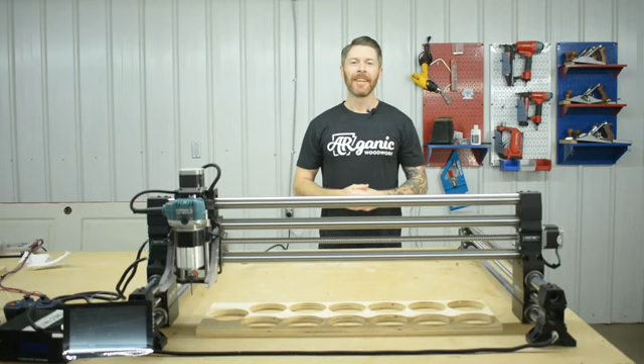Hey guys, Cody with Organic Woodwork, and I'm here with the Onefinity CNC machine again.

When we first introduced this into the shop, we had a lot going on as far as production and didn't have a lot of time to invest in putting together a mounting stand for this. After using the machine and seeing the durability and stability of it, I've decided that I want it to be a vertical mounting CNC, and today we're going to walk you through how we create our base for the Onefinity CNC machine.

Okay, so before we start building our frame and moving the CNC, we already have it temporarily secured to this workstation. When we did that, we made sure that it was completely square. So now, before we move it, we're going to measure our outside perimeters of the CNC. That way we know we get the exact measurement that we need for our frame for when we vertically mount this thing.

Alright, so here's my thinking behind the frame. This is the Onefinity that we have drawn up. As you can see, our y-axis are the points in which we screw down. Our y-axis points here and here are connected by two hollowed out steel beams that have wires to connect to the stepper motors, which are not drawn. Those two steel tubes plus the screwdrive mechanism in the middle make it very stable and extremely sturdy. So when mounting to the frame, our objective is to really control from our left and right y-axis points.

So we will take 8/4 pine, we'll rip it to 41 inches, seen here, and we will go from our left and right in both the bottom and the top, or the front and the back, however you want to view that. Remember, we're actually going to mount it this way. The x-axis also has two steel tubes plus the screwdrive mechanism, plus our x-axis has the stiffy attachment, so that gives it 3 steel tube attachments that connect our y-axis here and here.

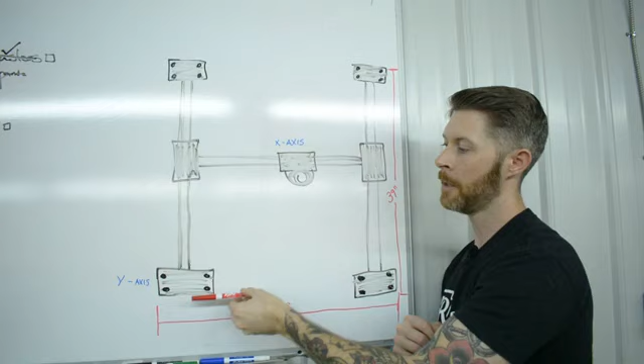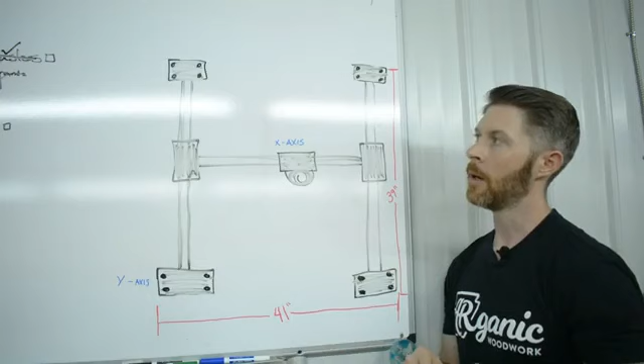So with those points plus our x-axis, once we get it squared up, it should be very sturdy and stable. Plus we're going to take MDF that is ripped down to 41 by 39, and that is going to cover the front to back. So we're going to have our pine here and here, running this way, and then our MDF, which will cover the entire facing, and that should give us plenty of stability to mount this thing on the wall.

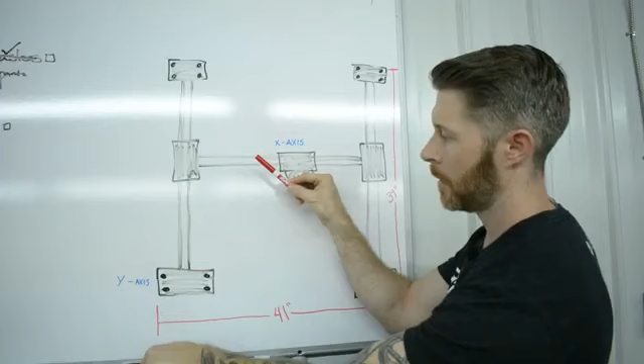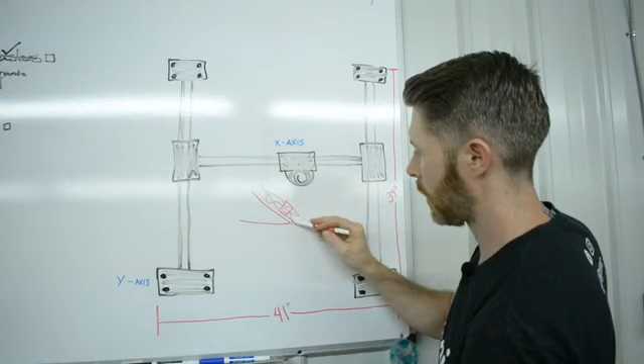And we're also going to mount hinges along the top, because the idea is for it to be on the wall. Then I can fold it out and have a piece that I can fold down, like so, and then I can just put my workpiece here and watch it cut, and gravity just lets the chips fall. So let's hope this works.

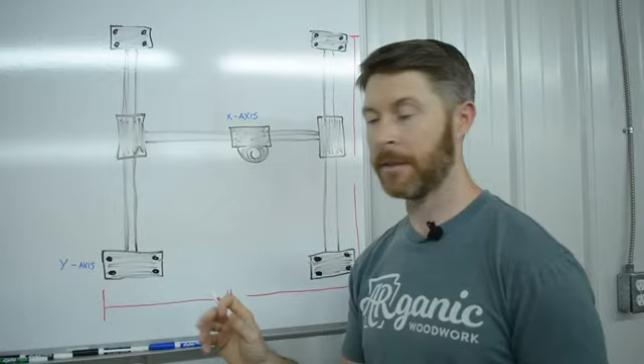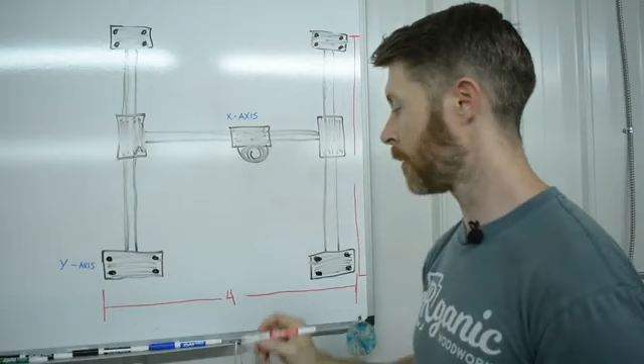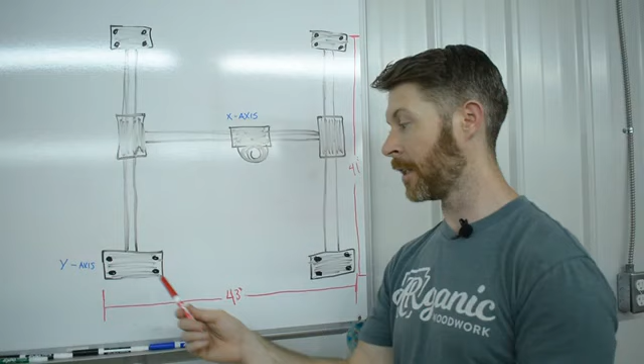Now, something to clarify here. I have the beta machine. Our beta machine is actually 41 by 39. The actual machine that will get shipped out will be 2 inches larger in both directions. So 43 and 41 inches will be the actual measurements of the production machine, not the beta machine. So if you're looking at this and thinking, oh, I'm going to make a platform, make it larger.

What we're gonna do, we have our cutout for the frame. These are not getting attached. These are just to measure out the overall distance from the board that is connecting the front and back of our y-axis. And then that will also be going with the MDF. We didn't have a straight sheet of MDF, so I actually have 2 panels that we're going to lay here. And that's fine to have that crease in the middle because we're going to put our Myers wasteboard on top of that. That way we have something to clamp our work pieces to. So let's do this.

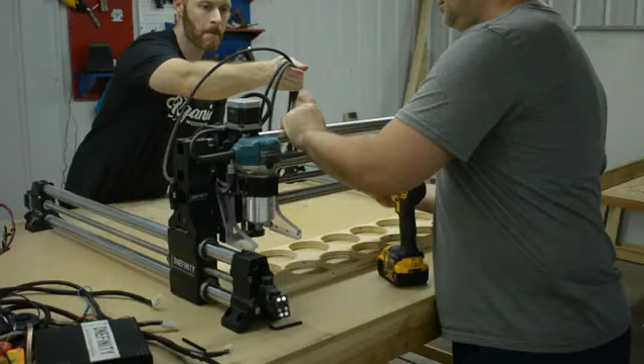All right, so we're gonna flip this over. We're gonna take apart the Onefinity and we're going to mount the Onefinity to the top of this. Lay that over there. Remember, it's heavy.

Okay, so now that we've moved the CNC from the work table where we had it screwed in temporarily, and we have it on our permanent frame that we're going to mount vertically, it's time to set it up just the same as we did before. We have our y-axis rails here. We're going to place our x-axis rail, and then use that to square the machine up, and then we'll put in the rest of our screws.

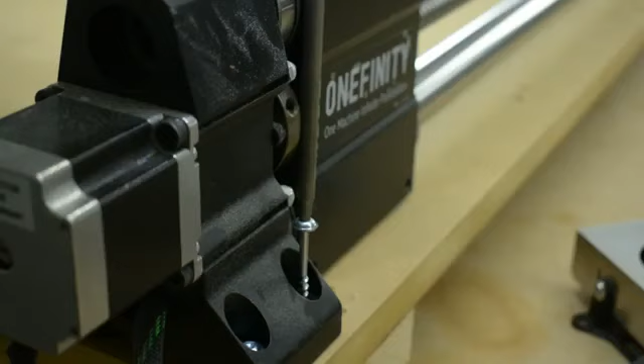Okay, so now that we have the Onefinity mounted onto our platform, we've squared the machine up, and we have all the screws down on it. It's time to install the hinges on our wall and get this thing hung.

Hey guys, so what we did is we reinforced the wall by adding that piece of stud, and that is what we're actually going to hang the Onefinity on. And we're going to use these hinges to do it, and I'll show you how I'm going to mount those now.

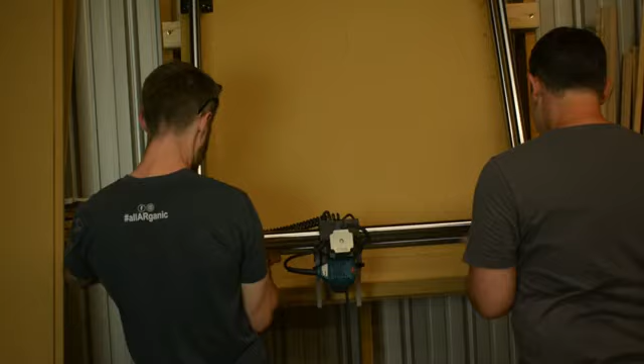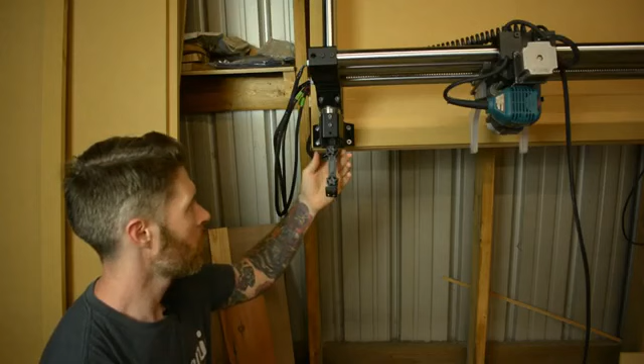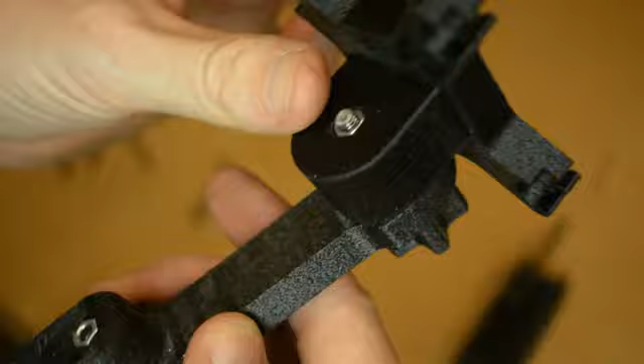We have everything mounted. The only thing is, for our monitor, it's here. But this mount is actually held in by Allen bolts. So we're actually going to take this mount out, and then we're going to screw it into that stud right there. That way we can just move it this way, and we can still have the monitor if we want it. So this is the mount that holds the monitor. As you can see, we're just going to put screws to mount this to the stud that it'll be going in.

Okay guys, so we have the Onefinity mounted. We mounted our monitor bracket to this stud. So we have that, it's plugged into our controller. Everything is turned on, and so now is the moment of truth. Let's see. All right, and that's about medium speed. Let's see what it does. Didn't slow it down at all.

Great. Okay, so we have our Myers wasteboard on the Onefinity table here, and now that we have that on there, we have our piece of stock, just a 5 by 3 inch piece of stock that we're going to do a relief carving in for a chess piece. So I have that clamped down, and now we're ready to begin our cut.

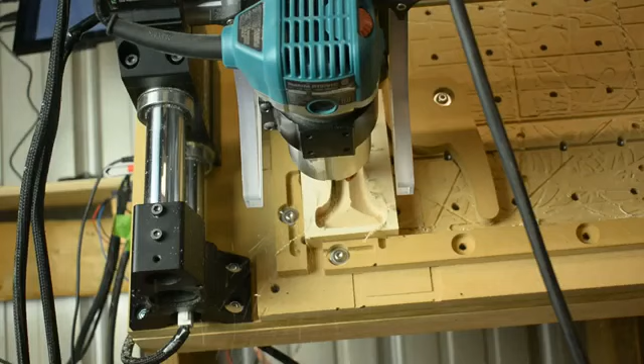Here is the half to the chess piece that we were needing. The reason I had to recarve this is because on the other piece the cross part on top of the king actually broke off, and so that's why I only had to recarve this one piece. It did great through the bit changes, kept zero. That was probably the only thing I was really worried about at this angle. Would it keep a zero because this x-axis is so much weight, would it falter either way? And it didn't, and it did great.

I really just wanted to mount it like this just to show off the fact that the machine can carve and do a 3D relief carving sideways at a 90-degree angle maybe, but it's not really practical, right, to cut like this all the time. It's unnecessary stress on the stepper motors for your y-axis, and changing the bit, it was going in and tinkering from above. If our zero was anywhere else on the table, it would be hard to really change the bit. So it's not practical. It was more of me just wanting to show off this concept, right?